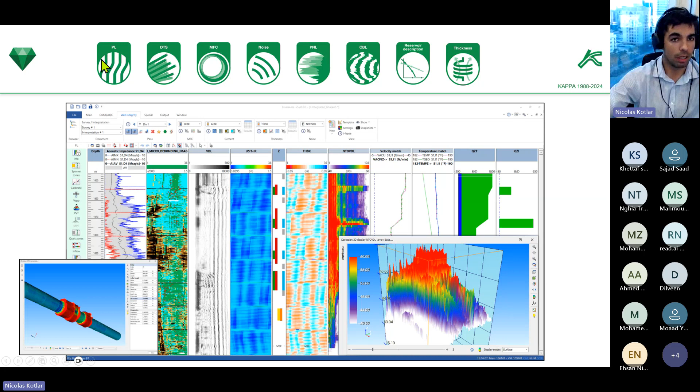Today we will focus on production logging, especially for vertical or slightly deviated wells that use conventional tools. So just to recap why production logs and what we want to achieve. Here you can see a typical well completion with 2 perforated intervals, tubing and casing. If we are lucky, at surface we will have surface rates, total commingled production from these 2, 3, 5 perforations or reservoir intervals, depending on how frequently we sample this well.

In a commingled scenario, we want to answer 3 particular questions. The first question is what fluid? Is it oil, gas, or water? Coming from where is the second question. Is 100% coming from the upper perforation or 100% from the bottom? Or is it coming from somewhere in between, a place that is not perforated, which could be the scenario of a leak? Do we have inflows at the gas lift valves? Are the gas lift valves active?

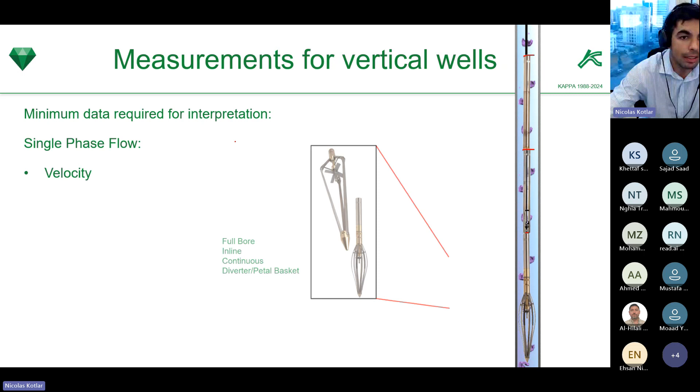So you may wonder, what tools do you need to run to achieve the previous objectives? What fluids come from where and how much? And the minimum depends on the number of fluids. So the easiest is to start with a single phase flow.

If you imagine single phase flow, this well here looks like a multi-phase. But in a single phase flow, we need to solve just one equation. This equation is the total rate at any depth. That is basically the fluid velocity, we'll call it VM, as average, or later a mixture, times the area of the pipe. So I need to know the fluid velocity.

And for that, in the industry, we typically use spinners like these ones. These are two types of full bore spinners: cage spinners, this one can only go at the bottom of the tool string. We typically tend to add a second spinner, a backup spinner that can go here in between. We will call this one the inline, in case this one fails, we will still have sources of velocity.

This, if you see, is basically like a turbine or a little fan that rotates. This rotation is what we will call revolutions per second, and we will convert those revolutions per second to fluid velocity, that is the required input. Okay, so that's the first. For single phase flow, we could handle it with a spinner. We will see later that we will still need to add other things, but the spinner is the key.

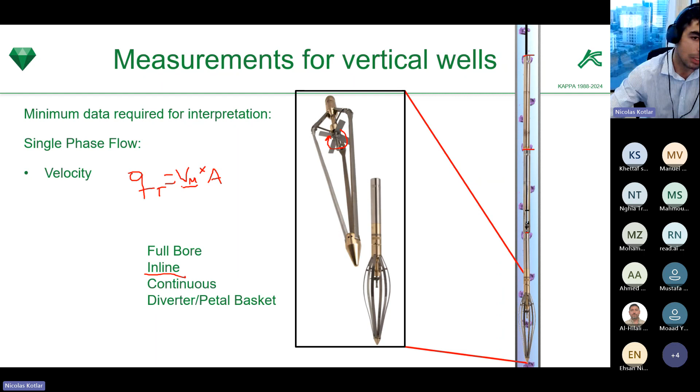Now, what happens if we have a two-phase flow? Well, this total rate now is composed by, let's imagine, oil and water. So this means that we need to split the total rate into the two phases. So we will need to say the percentage of the pipe occupied by the different phases.

And typically for vertical wells, for conventional PLT, something very typical is to add a density tool. The density tool will basically measure the mixture density, imagine an average between the water density and the oil in this case. And from that, we will know how much of each we have, and we will be able to calculate at any depth these two.

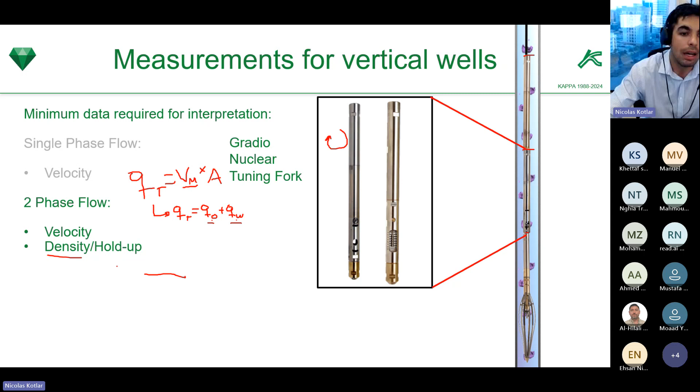So for two phases, we need at least one, we call it fluid identification tool. For three phases, now apart from the velocity and the density tool, we need a second independent source of fluid identification, because now we have the third phase. Let's imagine here would be we add the gas. And therefore it's not enough to split, for example, the density into the mixture density, but we need two independent fluid identification tools. Okay, so these are the necessary tools.

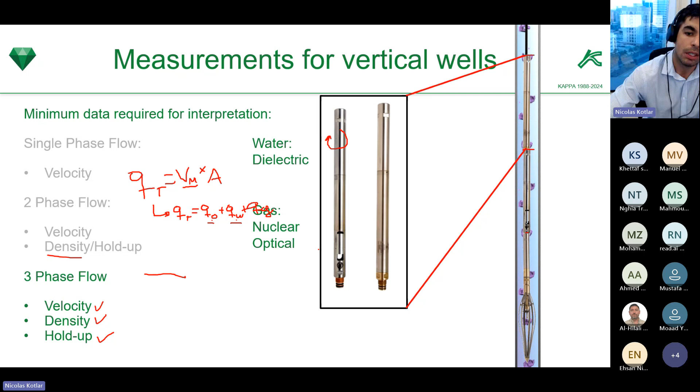How do we run this PLT? How do we acquire this data? And many of you may come from the open hole side, where in open hole we typically run a single pass, or maybe we run one pass and then a repeat section in an interval of interest. Here we do it slightly different.

If you see here, we have a gamma ray cable speed. If you see cable speed, we have a 0 and then positive values when the tool goes down and negative when the tool goes up. Spinner in RPS, pressure, temperature, and this is a density tool. So if you see the run sequence, we go down at a certain cable speed, then we go up. For example, 10 meters per minute down, 10 meters per minute up. 20 minutes down, 20 meters per minute up. 30, and 30 up again.

In this particular case, 40 up and 40 down and 40 up. So we end up with 4 down passes on the positive side, remember it's down passes, and on the negative side also 4 up passes at different cable speeds. We acquire this, in total 8 passes, to have redundancy in the measurement. In some measurements, if you see the density, all 8 passes are overlaying.

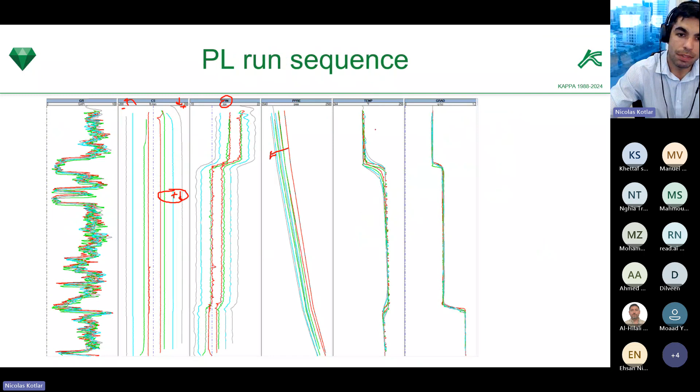Something interesting about these spinners is that they are fluid dependent. Imagine the spinner manufacturer - you will have in these webinars other different manufacturers - puts this spinner in a pipe, in a flow loop, and is able to pump at different flow rates, or different fluid velocities. You are pumping water, with a perfectly calibrated pump, so you have a fluid of known density and known velocity.

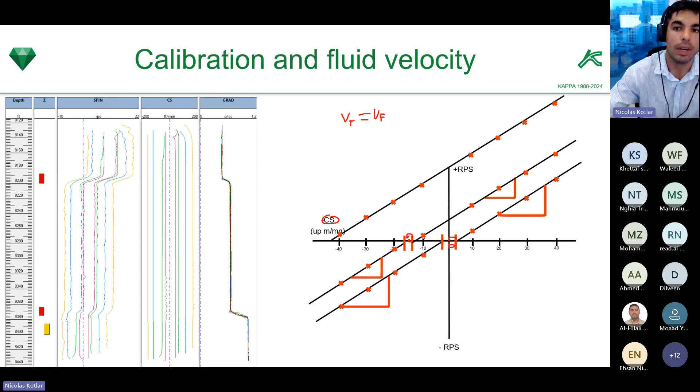Because apart from the intercept velocity, you need to add the threshold. Similarly, from this bottom spinner calibration zone, when you add this distance, it will be exactly 0 — meaning that in this bottom section, we are in a 0 fluid velocity environment, what we call a no-flow zone. So we will start our example with that.

Remember, the key here is to go from RPS and cable speed — through calibration, we obtain something called apparent velocity. If we have the velocity, we can quickly move to rate, in barrels per day, because the total rate at any depth will be this velocity. We will measure this velocity point by point.

So this is, let me call it, the mixture velocity — if I have time later, I will explain — times the area of the pipe. The area of the pipe, most of the time, we are quite certain of: we can use pi times ID squared divided by 4. Or if we are in an open hole environment, in a barefoot completion for example, you may want to use an XY caliper.

Good. So let's get started with Emeraude right now. Until now, we know how to obtain a single phase scenario, but our case will actually be multi-phase. So let's do it.

So this is Emeraude, for those of you who didn't know it. We will start by creating a new interpretation. This is just a single flowing survey, what we are going to do, so I'm going to call it flowing. And this well, we have some surface rates — can you see surface rates and conditions? These are not mandatory, but if you have a test separator...

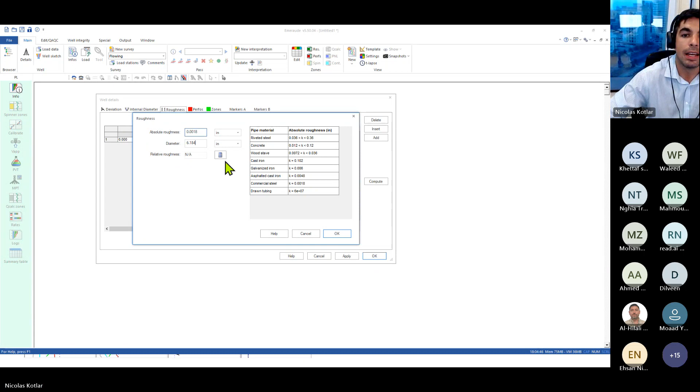Roughness. There are a number of tools that require corrections for frictional pressure drops, and these are a function of the roughness of the pipe. So if you don't know the roughness of the pipe, you click here on compute, and you will see a table with some typical values. It's also asking for the diameter, and so on. There we go. We calculate the relative roughness.

Then in this particular case, we have 2 perforated intervals. I'm going to enter these intervals here. These are our 2 perforated intervals. And that's it. We are not going to add markers. You could add geological markers, or mechanical markers of the well, like the depths of the packer, sliding sleeves and so on. In this case, it's a very simple well completion.

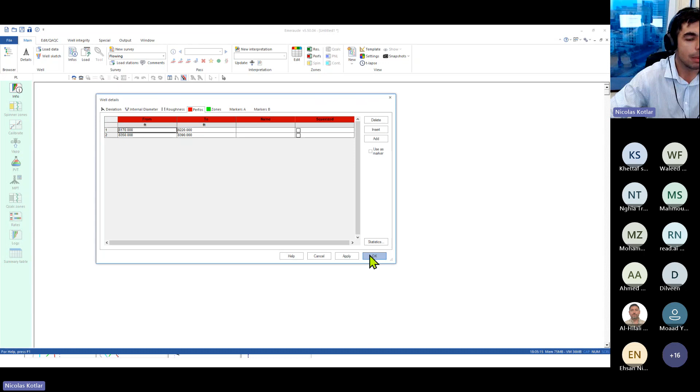You can see here, we loaded from details. This is the well data. We can load open hole logs. We can define a well schematic, but let's go straight to the PLT data. You can see we generated the first 2 tracks, the perforations and the ID. We are going to load some data here.

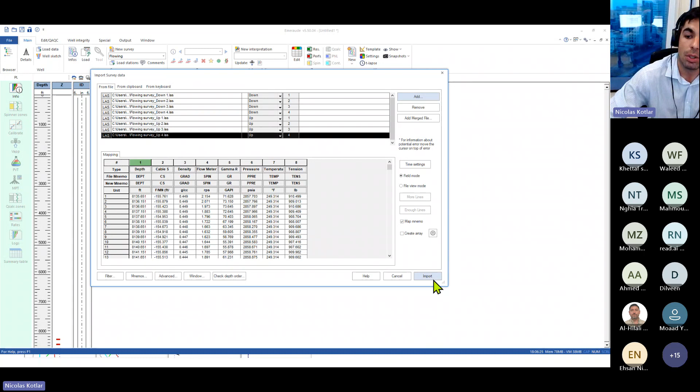Click add. And here you can see there are 4 down passes and 4 up passes that I'm going to select all in one go. Click open. And based on the mnemonic, Emeraude will identify the tool. For example, if Emeraude reads grad, it knows that it's a density tool. Spin, it knows that it's a spinner, a flow meter. So we have predefined mnemonics. Otherwise, if the mnemonics of your tools are not identified, you will have to do it manually the first time. So all good to load. I'm clicking import here, and the data is imported.

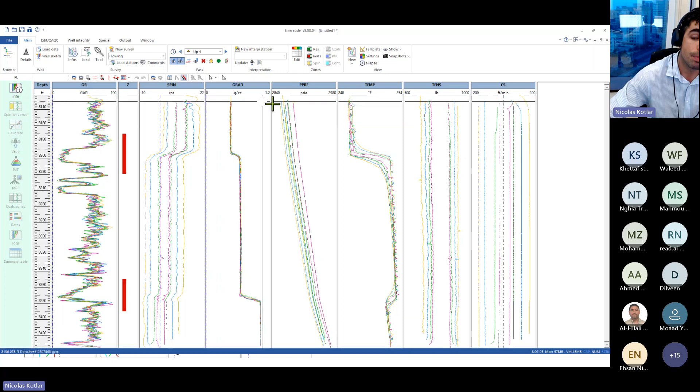Clearly, the scale is not ideal in this case. So there's a zoom and scale toolbar. If you click on the house, it resets the zoom. To occupy this space, you can move one by one like this, or use these tile plots. There we go. Now we can see the logs much better, and we can start rearranging things like this. And now we have the gamma ray, spinner, density, pressure, temperature, tension, and cable speed.

We would typically save this layout if we like it. We click on snapshot and save this layout. So whenever we want to come back to this layout, we just come here and select capture number 1. Okay, so data is loaded.

The last thing I'm going to do is tool information. Remember, we loaded this, and sometimes we need to provide some information. For example, if you use density tools, you need to identify the type of density tool. In this case, it's a gradiomanometer, and the spinner blade diameter, used for some velocity corrections, is 3 inches. Good. So we loaded the data.

And before going to the calculation itself, we typically start from the quality check. So here is the point of the interpretation where you need to be very structured. Typically, you would start from the gamma ray. We will load an open hole gamma ray or a CCL and some completion description. And if you see here, there are a number of depth matching or depth correlation options. In this case, we are going to skip this part, but the gamma ray is the first thing you would do.

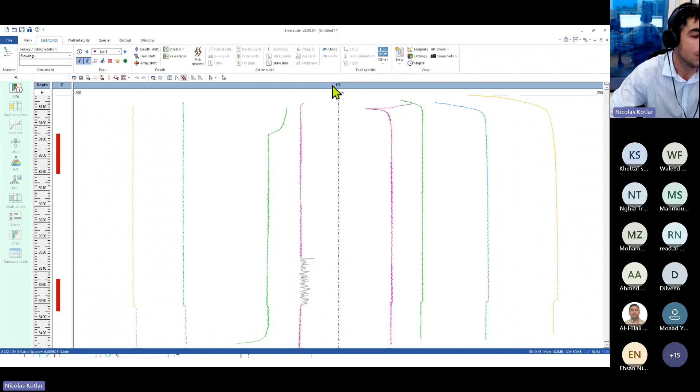And then if anything looks like noise or not a real measurement, we need to do something. So for example, here, this pass, if it has high amplitude noise here that is not representative of the cable speed, we can activate the measurement by using this pick nearest, and then we can use one of the editing options, for example, hide parts. There we go. And this data here that has been grayed out is not going to be used for any calculation, right? In production logging, whatever is not real is noise, and you shouldn't use it for interpretation.

We have the tension, the pressure, for example, here. Pressure will be used for computing the PVT properties. We need to know the densities, the formation volume factors, the viscosities downhole. So PVT will be initialized with this. So here, the pressure is showing some gradients, but it's showing that the passes are not overlaying, telling us that the well was not fully stable. In production logging, we want to be as stable as possible, right? Otherwise, we don't have a single snapshot in time, but we have a changing profile.

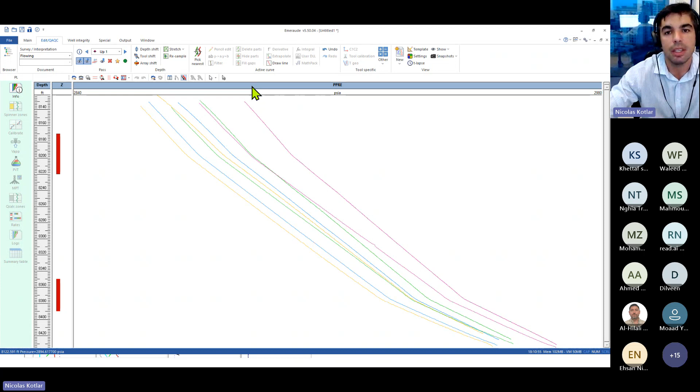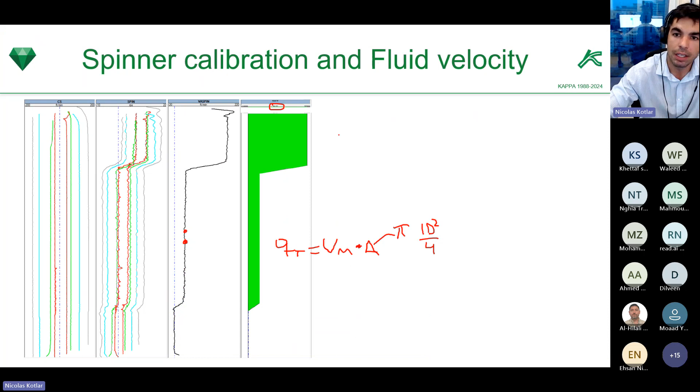But if you see here, these gradients also tell us something about the density distribution, right? Although I have a proper density tool, I can come here to pick nearest, click on pressure. I activate the pressure, and we can do the derivative, right? For example here, what we want is the dP. If we consider only the hydrostatic component, we know that this is the gravity times mixture density times z. So if we do the derivative dP over dz, we would obtain this mixture density. That is what I'm going to do right now. So I add a smoothing window of 4 feet, for example, and there we go.

Can you see here on the right, I have a new track called dPdz, in units of density, that shows basically the fluid distribution. Towards the bottom, we have heavy fluid, like 1 gram per cc. Here we have something 0.6 and so on. Remember that this is an oil and gas well, right? So we have water in the sump below the deepest perforation, but here it goes to the oil density, like 0.65, and then here it goes to 0.5. So we are starting to see what fluids are in this well, even without looking at the proper density tool.

By the way, they are very similar, but the actual density tool has better data quality because it's not affected by things like unstable well conditions. If you see here the temperature, it is quite noisy, electronic noise. Temperature between up and down passes has some hysteresis. I'm going to uncheck the up passes. So here are only the down passes.

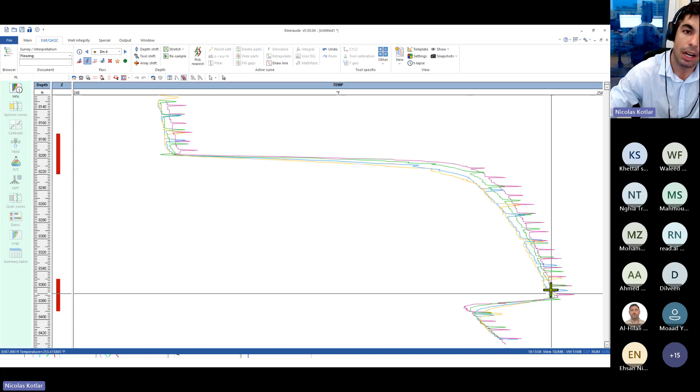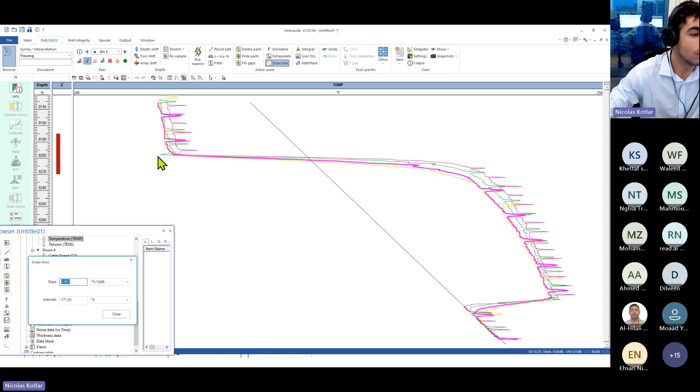If you see how this temperature behaves, I'm going to draw a line here. Let me move this here. I'm going to draw a line. There we go. And we see at the bottom perforation, we see warming, and at the upper perforation, we see cooling, right? I'm not going to go very deep into this, but you might remember that gas expansion from the reservoir into the well produces the Joule-Thomson cooling effect, which looks very much like this strong cooling, while this warming, on the other hand, is more indicative of liquid production.

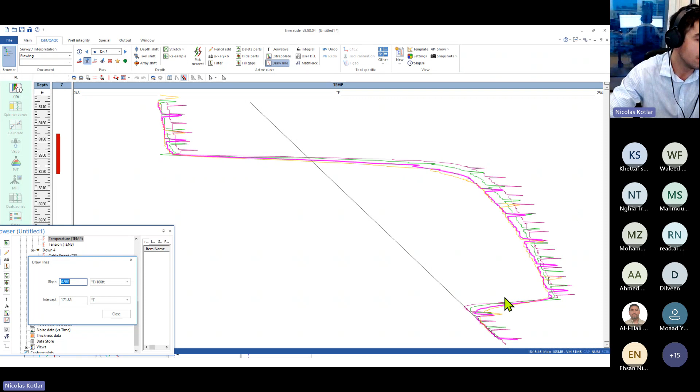So as mentioned before, we are looking at the density and the temperature, and these agree, right? So from non-moving water at the bottom, we see a warming, which indicates liquid inflow, and then the density goes to 0.65, so mainly oil filled. And then here we see the cooling from gas production, and the density goes to 0.40 something, which indicates a mixture of oil and gas.

Okay, let's move on. Next thing is we finish with this quick quality check. We understand now the productions and so on. The spinner needs to be converted into a fluid velocity. So I'm going to click here on information to create the first interpretation. We require reference channels for interpretations.

There are 8 passes, right? So the objective of the reference channel is to tell the software which of these 8 passes is the one of best quality or is the most representative of the downhole conditions, right? So if you click here on temperature, it is always best to select slow passes. When you want to have better detail, you do slow passes, and in down passes, okay?

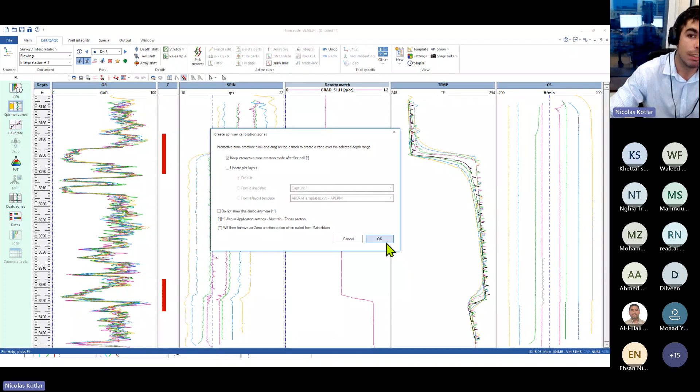And why I do this, because if you see now, once we are in this left panel, that is the interpretation panel, we just need to follow the options. So the first option here is spinner zones. We need to define the spinner calibration zones. Remember, the spinner will behave differently for each fluid type. So use the density to identify the fluid types.

So one density here, right? The mixture, the oil 0.60 something here, and at the bottom we have water, right? So in this particular case, remember having 3 spinner calibration zones. When you come to the calibration crossplot, there will be 3 lines that you can activate using this option, right? And then the objective was to find the slopes and the thresholds, and from this, the software will calculate the fluid velocity. So through regression, the software gets the slopes, right?

For example, for this zone, it got the slope here. So in this case, being a no flow zone, this intercept corresponds to the threshold. So I come here to the threshold and set this as my threshold. In the middle zone, right, there is fluid movement, so you cannot calculate the threshold in the same way. The threshold in this way, you can only calculate it at 0 fluid velocity.

But remember that the objective here is to go from RPS to fluid velocity. So whether you come from this positive line or from this negative line, the fluid velocity has to be the same, right? So what we are going to do is use an option that takes this separation and divides the gap by 2. That is this one. There we go.

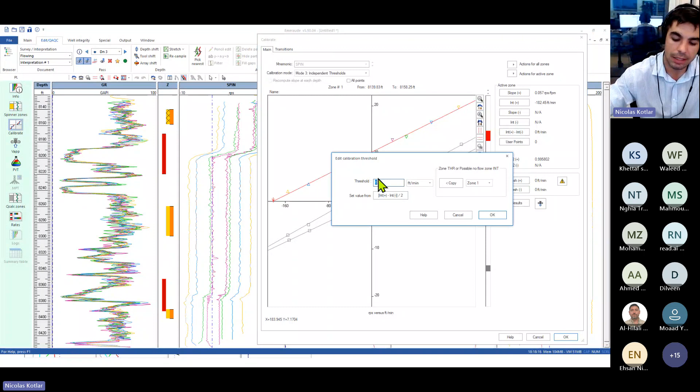And up here, there is a zone where all the RPS are positive, so you cannot calculate the threshold in any of these ways. Here you tend to use rules of thumb. I can come back to this later. Just let me enter a value of 14. This is basically a multiplier of the threshold that I got at the bottom zone, right? So we click OK here.

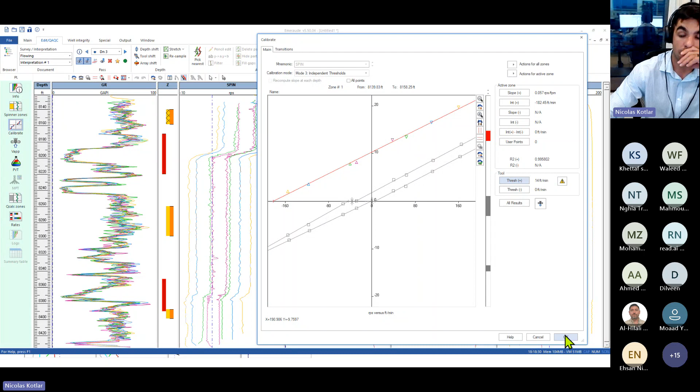Once the slopes and the thresholds are computed, you see this apparent velocity. It can be calculated by a simple equation, right? The apparent velocity, V app, as seen by the spinner, is the RPS of the spinner measured at any point. So point by point, the software will take the RPS divided by the slope.

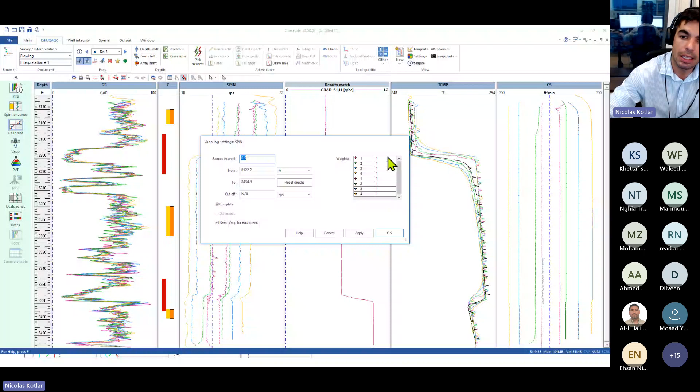The slope is what we just calculated in the calibration crossplot, minus the cable speed. Again, the cable speed is a measurement, so point by point, the software will get each value, and then plus the threshold of the calibration crossplot, right? So once we calibrate, we would be able to generate an apparent velocity even just by considering one pass. In this case, we're going to use all of them, and there we go. Can you see I have a velocity match here, that we went from RPS to fluid velocity?

One more thing is that, as mentioned, to calculate the apparent velocity, we use the slopes and thresholds from the calibration crossplot. But here, in this case, we have 3 different slopes and thresholds, right? Through these orange zones, you can say what's the application interval for each of the 3 sets of calibration parameters. So I'm going to use this zone like this. And if you see, I'm using the density as the reference, I'm extending the calibration zones based on this density and on the interfaces, right?

So here I just need to regenerate the apparent velocity, and there we go. So this is a good apparent velocity, showing 0 fluid velocity, a certain velocity here, and of course it increases even more, right? So we are nearly there.

So with this, remember, we are ready to compute the total rate, right? But this well is not a single phase well, right? It produces oil and gas. So what happens when we have a multi-phase scenario? So in a situation like this, well, in this particular case, there is oil and gas, right?

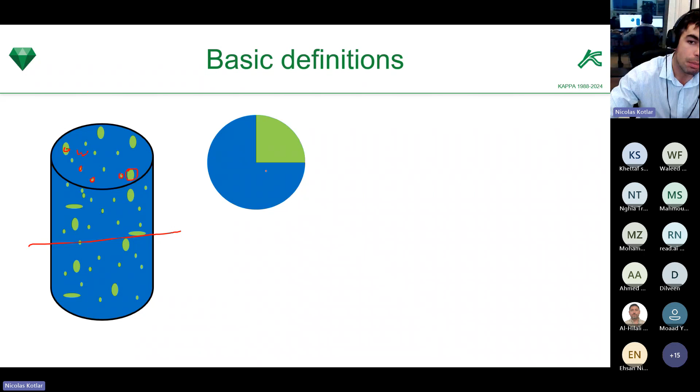And you make a cross section at certain depth of the well, and start counting the area that the oil occupies. Imagine that we can somehow count the area that the oil occupies, and we plot it in something like this. So we will see here that the oil occupies 25%, the water 75%. How do we call these areas? These are the holdups, right?

So the holdup of the oil is the area occupied by the oil at certain depth of the well, or we can talk about volumes. If you talk about control volumes, it's the volume divided by a total control volume, right? And why do we need these two? Well, because now the two rates that we want to calculate, this is the water rate, is the velocity of the water times the area of the pipe.

But now, if you see, the water does not travel across the full area of the pipe, but occupies a fraction that is the water holdup, right? Similarly with the oil: the oil velocity times the area, but the oil again occupies the area of the oil. So what tool can we use to compute these areas, these holdups of oil and water?

Well, in this case, what we have is a density tool, a mixture density tool. We put a density tool here, and this mixture density, this gradiomanometer in our case, will be influenced by the density of the oil and the density of the water. So it will be the density of the oil times the holdup of the oil, plus the same for the water, right?

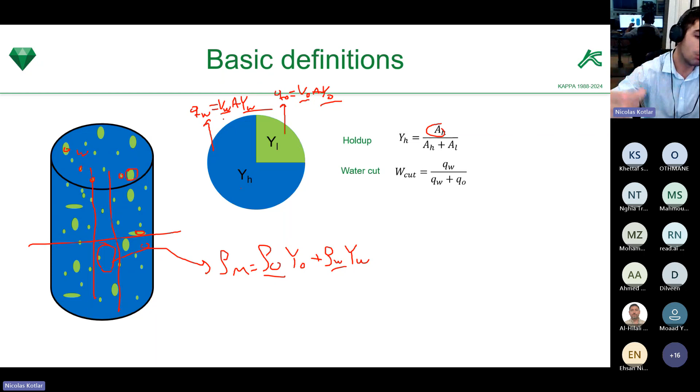If you open, for example, a soda, you will see that the bubbles go up while the liquid remains. So this means that the bubbles, the gas part, have a relative velocity with respect to the non-moving liquid part. And this is what we call the slippage velocity, and this is the last missing part here. So who provides this slippage velocity?

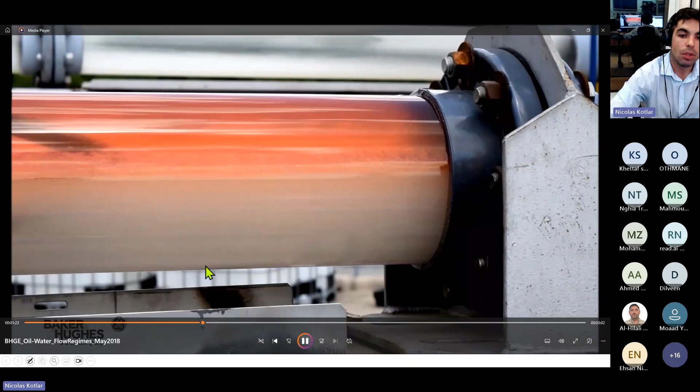So here, let me show you quickly the phenomena. I acknowledge our friends from Baker Hughes, who allow us to use this video. Can you see? For example, here you have a horizontal pipe. This is a very particular case of stratified flow regime with water and oil. But as mentioned here, can you see this?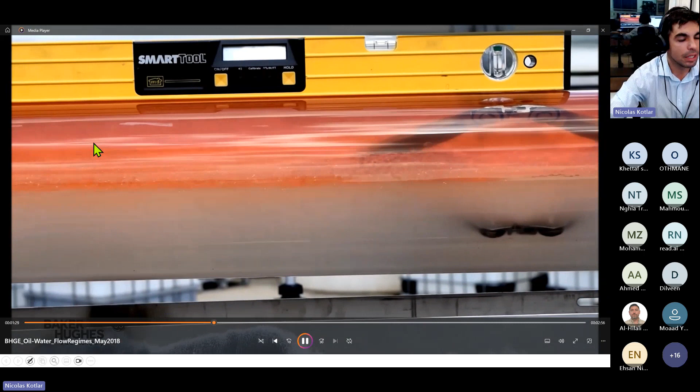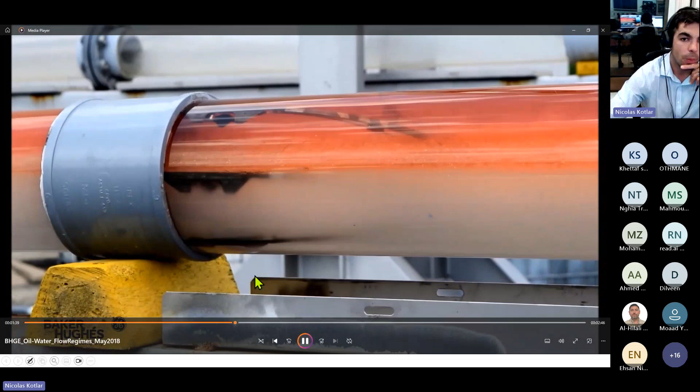It's 1,000 barrels of water and 1,000 barrels of oil, right? In a perfectly horizontal well, 90 degrees. You can see that in this case they occupy, using the concept we just learned, the holdup, 50-50 each, right? The water cut is 50% because there is 1,000 barrels of oil and 1,000 of water. And the holdup in this particular case is also 50%, right?

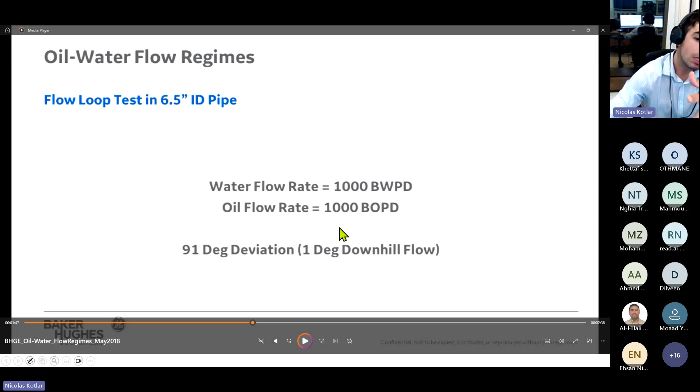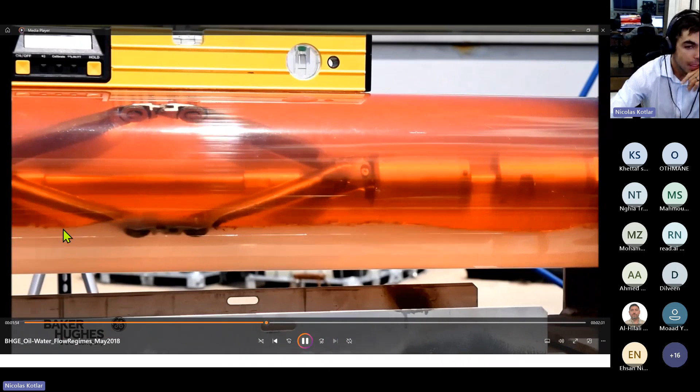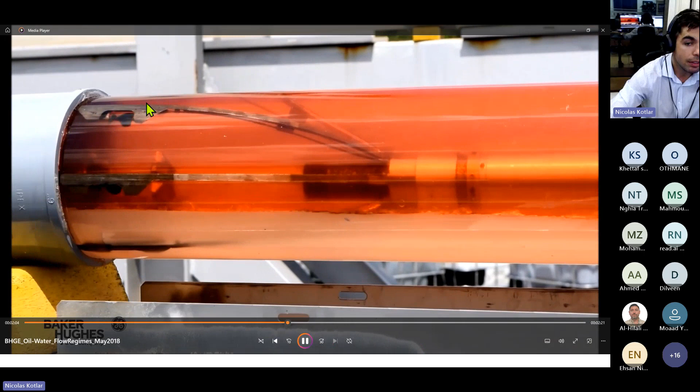But look what happens if we change the deviation, for example, 1 degree. Can you see the rates are the same? So the water cut is the same. We just change 1 degree downhill. Now look at the water holdup. Can you see? Now the water occupies maybe less than around 30%, I would say, and the oil 70. And it occupies 30 because the water is moving faster.

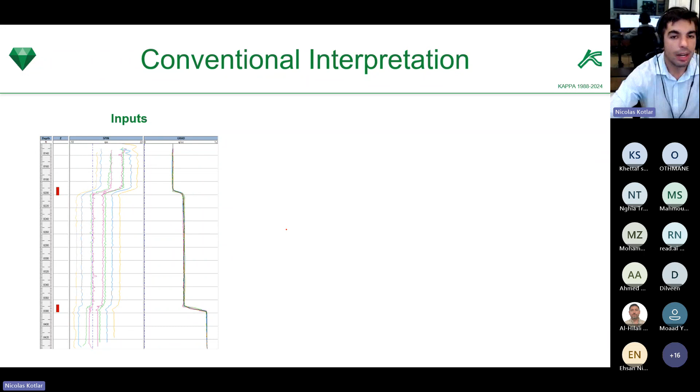If we go the other way around, 89, 1 degree uphill. Now the oil occupies a smaller area because the oil moves much faster, right? So the relative velocities, what we call the slippage velocity, keep changing, right?

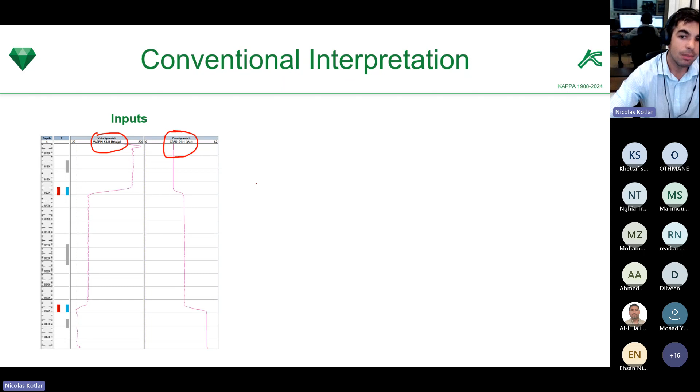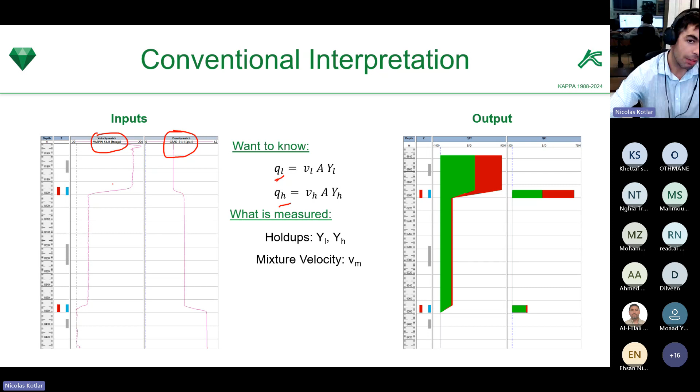So remember, what we know at this depth is the velocity and the density, and we want to obtain the final results, meaning the individual rates. So for this, we measure the velocity and the density or the holdups, right? But to have a closure of all the equations, we are still missing the slippage velocity. Who will provide the slippage velocity?

Multi-phase correlations, right? In Emeraude, let me skip this one, but in Emeraude we will use different slip correlations that will identify the flow regimes. Something important is that in multi-phase conditions, oil and gas travel in an immiscible way, and the relative fluid velocity, the gas minus oil velocity in this case, will change depending on the way the fluids are arranged. This is called the flow regimes.

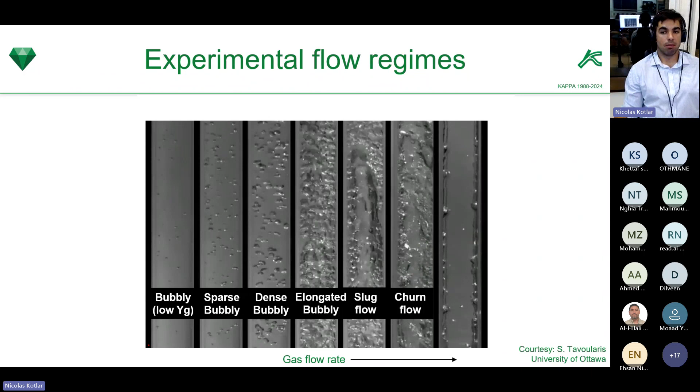So can you see here, bubble flow, dense, bigger bubbles start to coalesce. The gas here becomes a continuous phase. Then at some point, the gas forms some sort of bullets, called Taylor bubbles. That is typical of slug flow. The bullets break and form this sort of churn. Then finally, at very high gas rates, the gas is the continuous phase, while the liquid forms an annular film on the pipe wall, right? Each of these scenarios will bring a different slippage velocity.

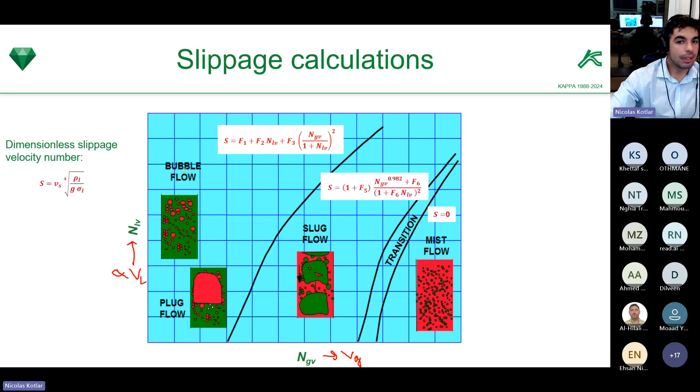And therefore many multi-phase flow correlations predict a flow regime map. This is a multi-phase correlation called Duns and Ros that identifies areas. These axes are basically a function of the gas and liquid velocity. This is specifically called liquid velocity number, so it depends also on PVT. But it is proportional to the liquid velocity, and this is proportional to the gas velocity. So depending on the fluid velocities, the two phases will arrange as bubble, as slug, as mist.

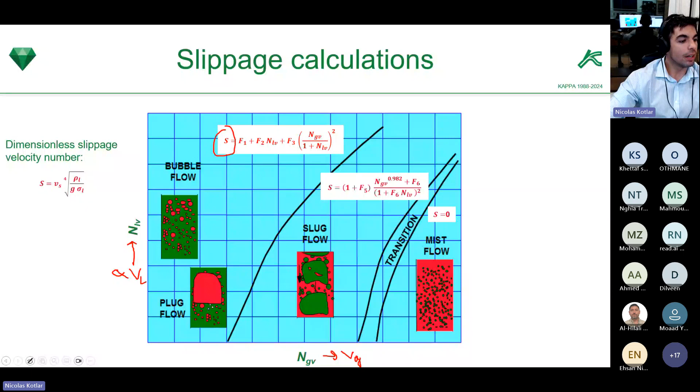So the people who developed these correlations identified this through experimental means, computational means, and so on, and provided equations for the slippage velocity for each of the regions. So this is what Emeraude needs now to solve the scenario. So I'm coming back here. The last thing I need to do, I'm about to solve the problem here. I just come here to Q calculations.

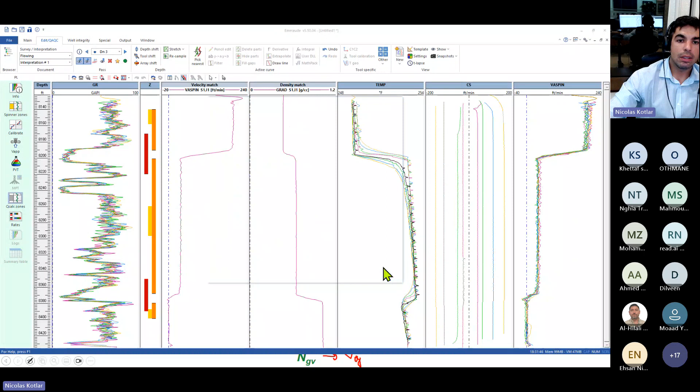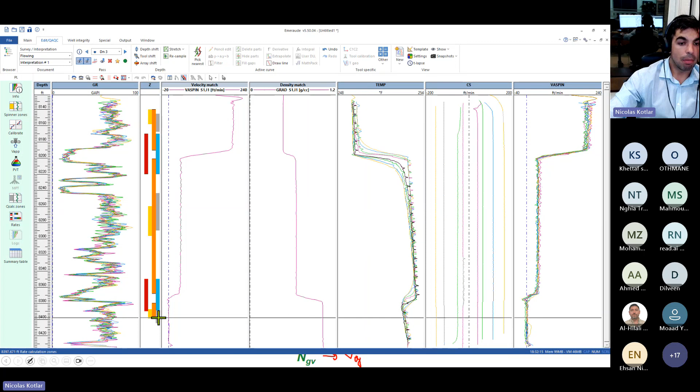Can you see we have two perforated intervals. So to know how much this perforation produces, I calculate the rate above, where I set a gray zone, and below. If I know the rate above and the rate here, the difference is what this perforation produces. And the same below here. I can calculate the rate here, and then minus here would be the contribution from the bottom perforation.

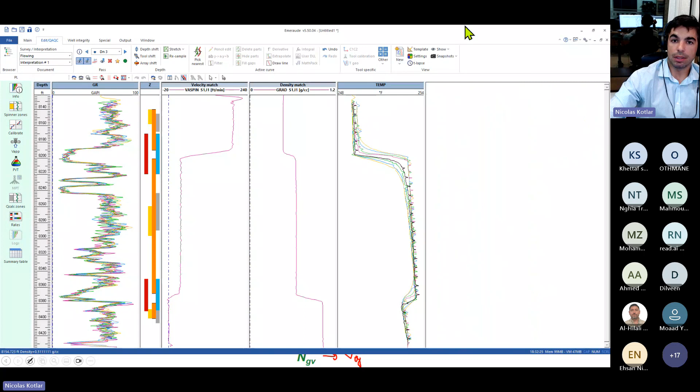So let's go to the last step. Let me get rid of this so we have more space. We click on rates. We are solving a liquid gas model, and it uses a multi-phase flow correlation. If we had more time, we would talk about the different correlations, which essentially provide different slippage velocities. So for example, here, let's keep using Dukler.

For each rate calculation zone, each of these zones in gray, it identifies the flow regime: slug, for example, up here. If we go to the middle, it's bubble flow. So the flow regime clearly changes with depth and with the proportions of each fluid.

And then it provides a slippage velocity. So the last thing I'm going to do is just create the production profile, and there we go. We create the two typical plots: the cumulative, which we call QZT, and the contributions QZI. Both are in downhole barrels per day.

And can you see here we are applying a match on the velocity. Here is showing, for example, the green is the model, the red is the actual measured or computed velocity. If these two are not matching perfectly, the measured velocity in red changes quite suddenly, while the one in green, our model, is more progressive.

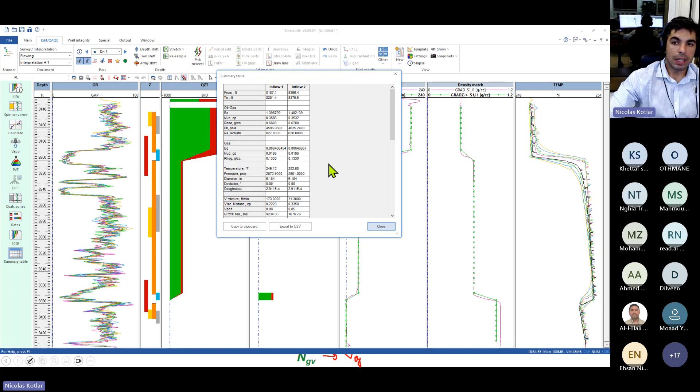The results are also seen in the summary table in terms of downhole rates and surface rates. So for example, here for each of the inflow zones, you will see the oil rate in downhole barrels, surface barrels, the percentage of each phase, and the same with total fluids and everything. So these are the two typical ways to present the data, as QZT and QZI, and the tabulated results that you would use to make decisions about what you want to do with your well.

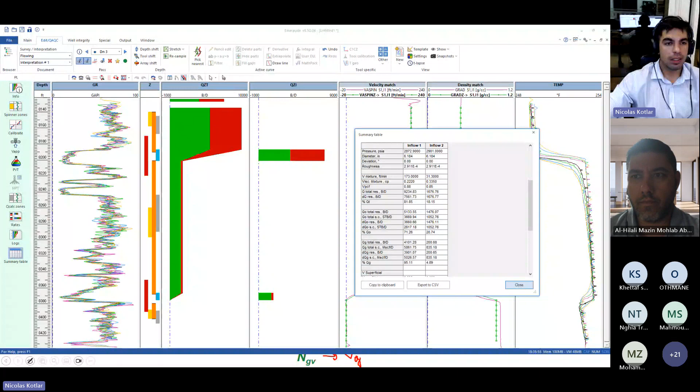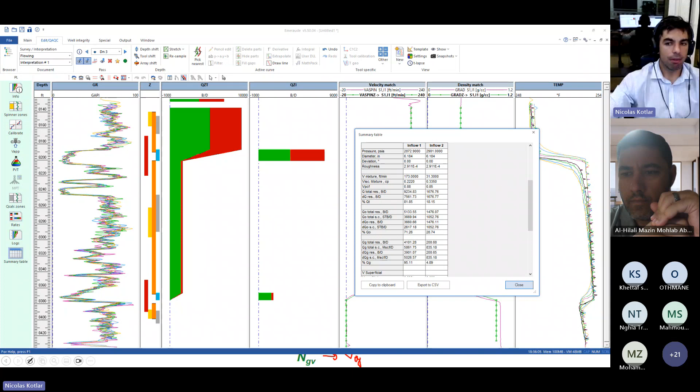In this particular case, there was no particular objective like water shut off or anything. It was just reservoir description. So this was a two-phase case in a nutshell. Very quickly, there is much more in terms of quality check and application of multi-phase flow correlations, but for one hour, I think this is enough.

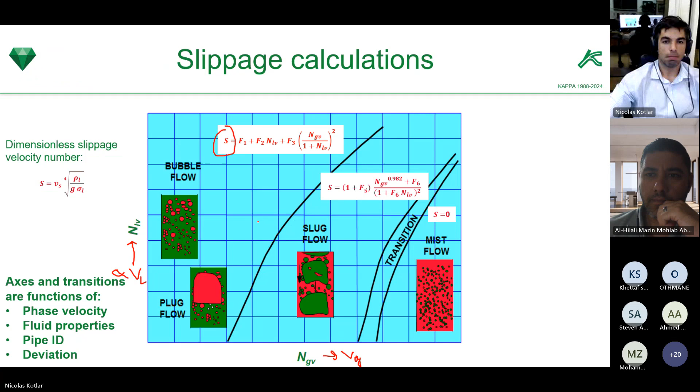The slide or Emeraude itself here? Yes, the software itself. So am I to understand that making an adjustment to your perforation size is what allowed the model to match?

So is your comment back to the client that only that little bit of their perforated interval is producing? Yes, that is a good observation, and that is correct.

In this particular case, production logging can also be used as a tool to refine the KH, the producing thickness, because at this particular depth is the only interval where we see the increase in fluid velocity, the decrease in temperature due to Joule-Thomson and the fluid interface. So all the measurements indicate that the variations of properties or total rate occur there.

So in this particular case, yes, this is something I could go back to my client saying the upper perforation produces only from a quarter of the perforated thickness, and let's analyze why the rest is not producing. I would believe that from the open hole and cased hole gamma ray, we are likely to have shaly intervals here, but in other cases we need to analyze whether the perforations were really shot at that depth and were effective, because otherwise, by reperforating, by acidizing, by applying some stimulation, we may gain a few feet or meters of producing thickness.

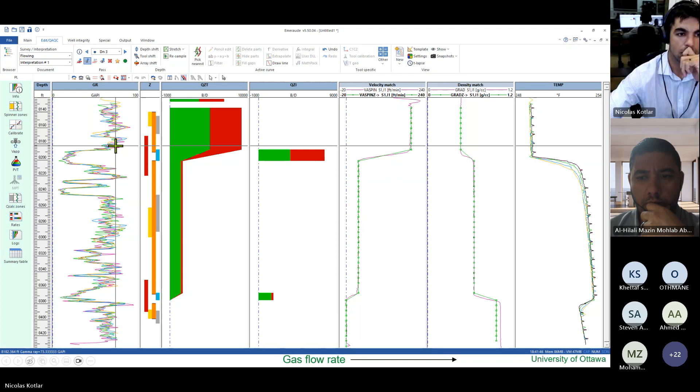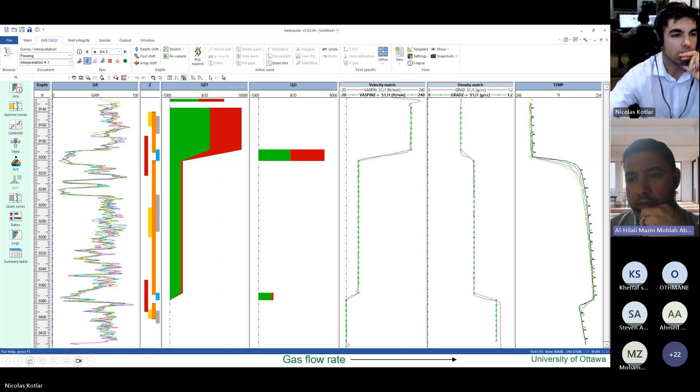So we have two questions on the chat. One question from Elshad: he's asking which one is better, spinner or temperature, for identifying flow.

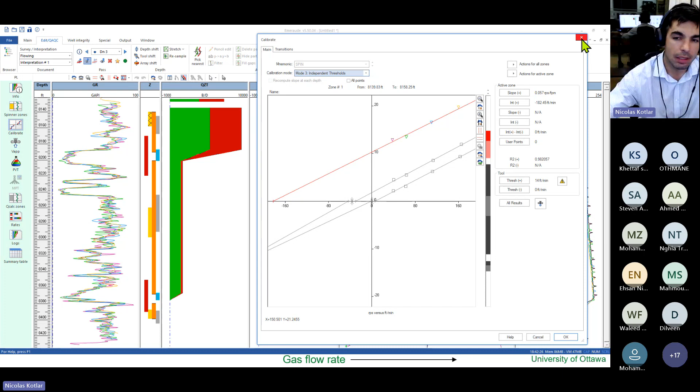Temperature, the good thing is that it's very, very sensitive. If you remember we talked about some properties of the flow meters, the sensitivity, and also the threshold. There's also something else we didn't talk about: the resolution. In general, temperature tends to be one of the most sensitive measurements we have in the tool string. So for identifying small changes, for example here the temperature changes are very clear. But otherwise, if you have smaller temperature changes, you can take the temperature itself and apply the derivative, as we did the derivative for the pressure.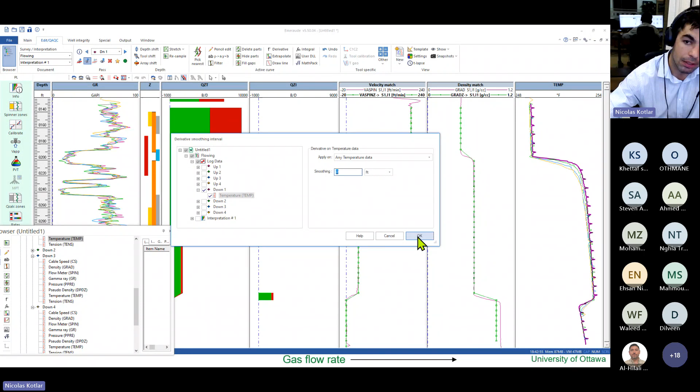We can do the same for the temperature. Now we have the temperature derivative and can see exactly where the large temperature changes are.

Sorry, if someone can mute. There we go, I'm muted. Okay, there we go.

So temperature tends to be very, very sensitive. And something interesting about temperature is that it also feels behind casing. Spinner is limited to inside of the casing, but temperature, if you have behind-casing phenomena like flow through cement channels, you can also use it. But for the quantification, going from this to a flow profile, the spinner is definitely easier.

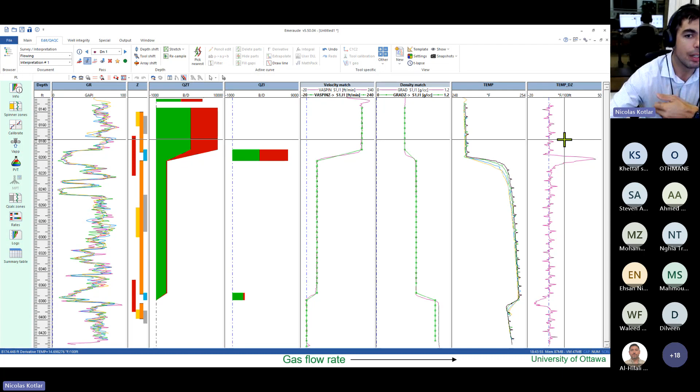Going from temperature to flow profile is an inverse problem that requires a fairly good understanding of the reservoir thermal properties. So it's much more straightforward to use the spinner.

Okay, thank you. I believe Mohammed Shahid, Mohammed Rada, you can jump in and open your speaker. Yeah, thank you Mr. Nicolas, it was a good lecture, but I have one question.

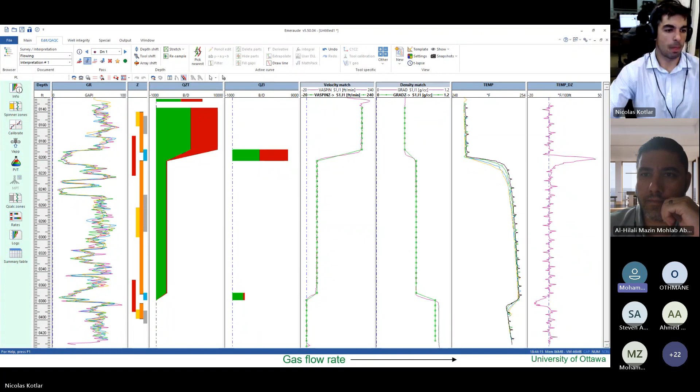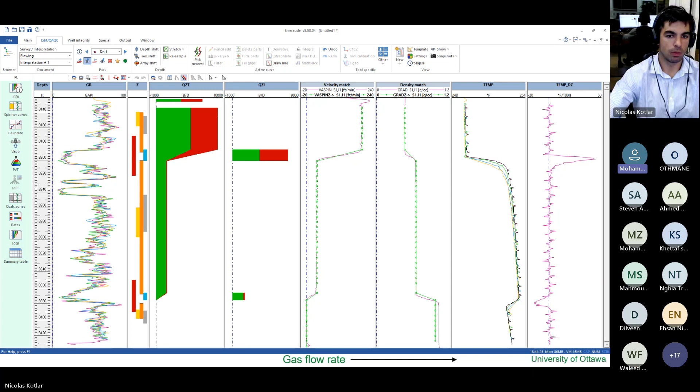You mentioned that the temperature can feel the flow behind casing, channeling, or something like that. What's the effect of this flow behind casing on the temperature curve? Is it cooling or heating, or what? Can you please mention that?

Yes, and it will really depend. Let me see if I can add one slide here. It will depend on what's the source of the fluid.

Let's imagine I'm going to do some axes: temperature on the horizontal, and depth on the vertical. Sorry, I'm using my mouse and my hand is not very good. So this is temperature versus depth. Imagine that we have these two perforated intervals.

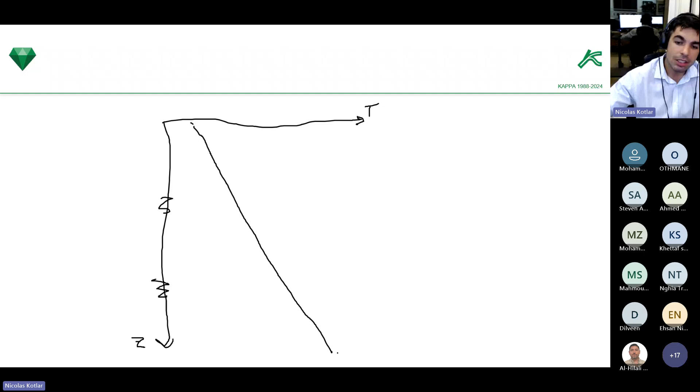Something interesting when analyzing temperature is to think about what would happen when there's no fluid movement. Imagine there's pretty much no well there, so the formation is still at its original geothermal temperature. In this case, imagine we would have this: the Tgeo, the geothermal gradient, is always very important, because if there are no fluid inflows or outflows, we would expect the temperature to follow that.

Now let's imagine what would happen with a logging if these two intervals produce liquid. If the liquid comes from here and from here, what would happen is that, if I start logging from below the deepest perforation, below the deepest perforation there is no fluid movement. So the temperature inside of the pipe and behind will be the same. So below the deepest perforation, the temperatures will be like this.

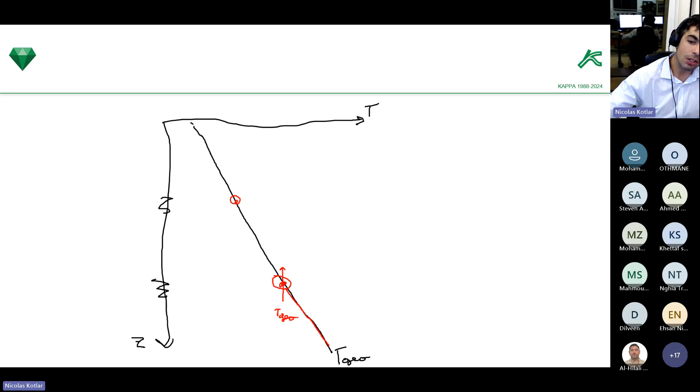Now, at this perforation, imagine that we don't have channeling - I'll overlap the case of channeling later. If you don't have channeling and this produces liquid, the fluid coming from here will be exactly at this geothermal temperature, at the Tgeo at this particular depth. Tgeo at bottom perforation, let's call it B. And the fluid will enter at this temperature.

At some point, we'll start exchanging heat with the formation and we'll try to go back parallel. Actually, in the literature, you will find a few methods. One is the Ramey method that uses this offset between the geothermal and the measured temperature to estimate the rate. Then what happens if we have another fluid inflow from here?

Well, we are bringing warmer fluids from below, and then we are injecting or producing fluids at this temperature. So the overall temperature will decrease, although it's not a gas. It can still lead to a temperature decrease. For gas, on the other hand, we would see the typical Joule-Thomson effect as we see below. So on one side, this is for liquid, and on this side is for gas.

So this is if we have production only from the two perforations. Now, what would happen if there is fluid movement from below? Imagine that there is bad cement in all of this interval. The temperature will depart from the geothermal from below, because now we are lifting, even behind casing, warmer fluids coming from deeper perforations.

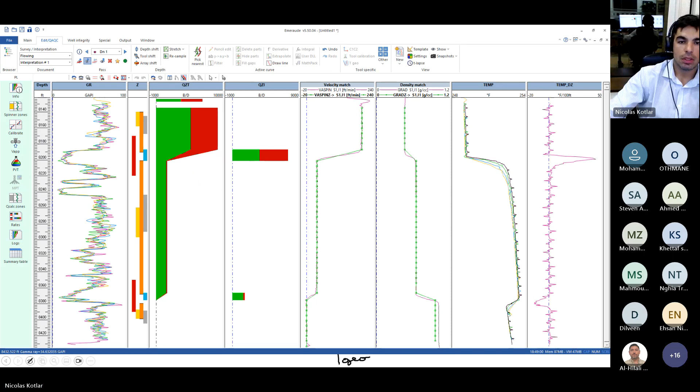Good point. This is something I didn't have much time to talk about, but remember that the only place where we can really measure a threshold is in this bottom zone. We need an interval of zero fluid velocity to measure the threshold.

Because this gap is completely given by the minimum cable movement needed for the spinner to start to rotate, basically. So what we did in Emeraude is we calculated here at the bottom. And then for zones like this where we have no chance of computing a threshold...

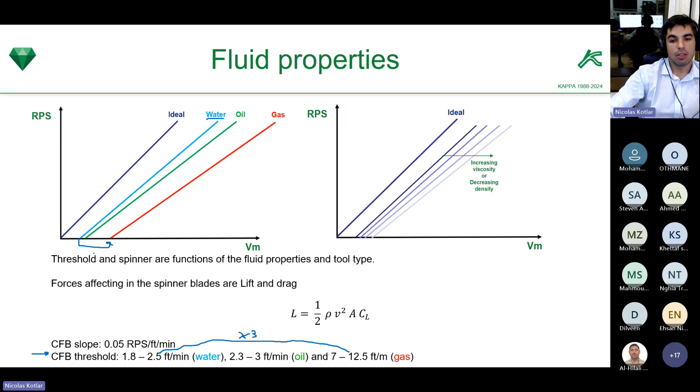So in many cases, you are able to calculate the threshold in the bottom spinner calibration zone, which may happen to be filled with water for a water sump. And if up here is single phase gas, this is a way that you can take your thresholds, using a value like this. So these are the type of rule of thumbs that I was referring to.